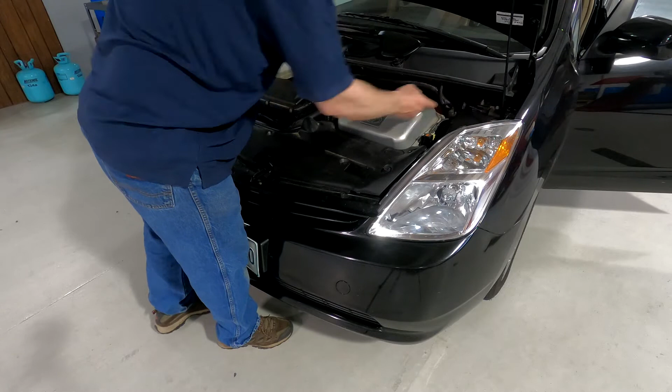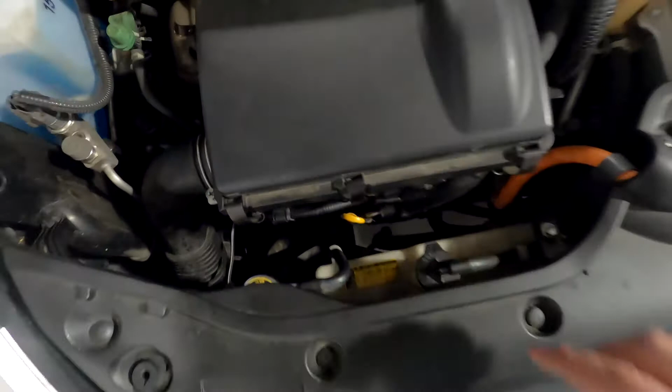There's also a prop rod that's going to hold the hood up, and in this case we place it into a slot over to the side, and that's what holds our hood up. So now we're going to check the oil. In this particular vehicle, the dipstick is this yellow handle right here. I know that because I've checked many vehicles in the past, but if you weren't sure which one it was, you could go to your owner's manual and look to see where the dipstick is for the engine oil.

So you want to use a clean rag, and we're going to grab the dipstick, we're going to pull it out, and what we want to do is we want to wipe it clean initially, and then we're going to put it back in the dipstick tube until it seats fully. We're going to pull it back out again, and we're going to check the level.

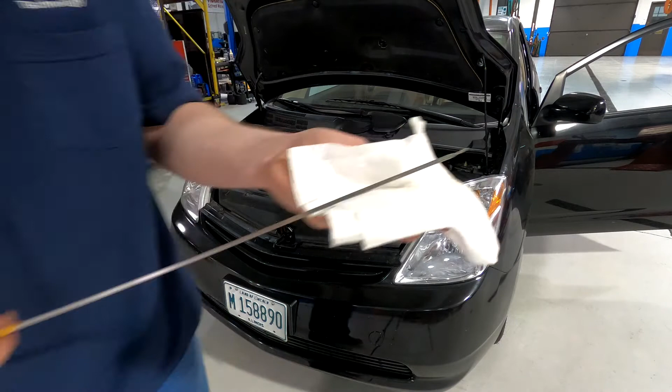And I'm not sure if this will show up well on the camera, but basically we have two marks. We have a low mark and we have a full mark. We want to be in between there. And what you're going to see is the oil, it kind of reflects on the dipstick. So right now our oil level is right up here, so that's up toward the top, and that fluid level is okay. That's exactly what we want.

The oil is nice and clean, so if you can barely see it on the dipstick, that's an indicator that you have very clean oil, and that's ideal. That's what we want. When we change our engine oil, that's to keep it in good shape. So the engine oil is what lubricates everything inside the engine, and if we don't keep it clean, we can have issues with various systems. It increases wear and will reduce the lifespan of that engine.

So I've referred to the owner's manual in the vehicle. Typically where you're going to find the owner's manual is inside the glove box.

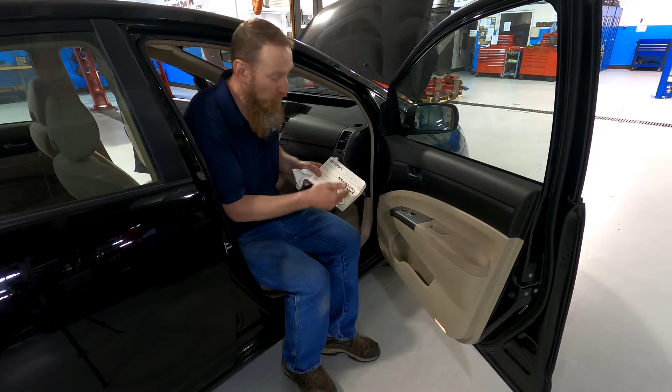So this manual will cover all the important features of the vehicle, how to operate all of the functions of the vehicle, as well as show us where the engine oil is located, right? Where the dipstick is located, how to check the engine oil, what type of oil it's supposed to use.

It will give us instructions on how to change a tire, not necessarily how to repair the tire itself, but take the deflated tire off of the vehicle and replace it with the spare tire that is in the back. So again, it would be worthwhile to read through this manual and familiarize yourself with the vehicle. Obviously you want to be familiar with it before you start to drive the vehicle.

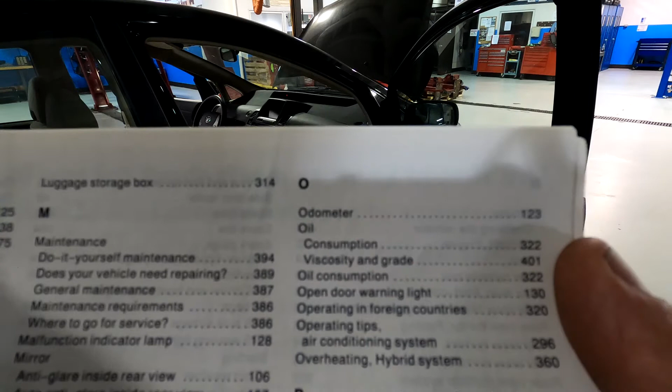If you don't have an owner's manual, sometimes you can buy old manuals online or you can buy them at the junkyard. This one is made specifically for the vehicle and it should be for your particular vehicle. But there's a lot of great information in here. So I've just gone to the back of this manual and right here it says oil consumption, oil viscosity and grade, and so that's what we're after right now.

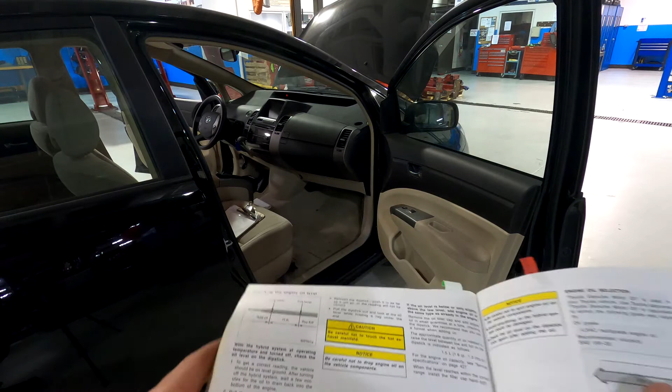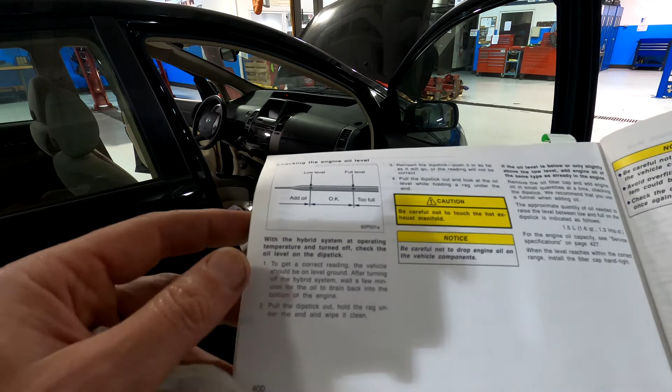So if I go to page 400, it basically shows us the same information that I just talked about. It shows you the low level on that dipstick, it shows you the full level on that dipstick, it gives you the procedure to get the correct reading. So you want to be on level ground. You want to make sure the vehicle is turned off.

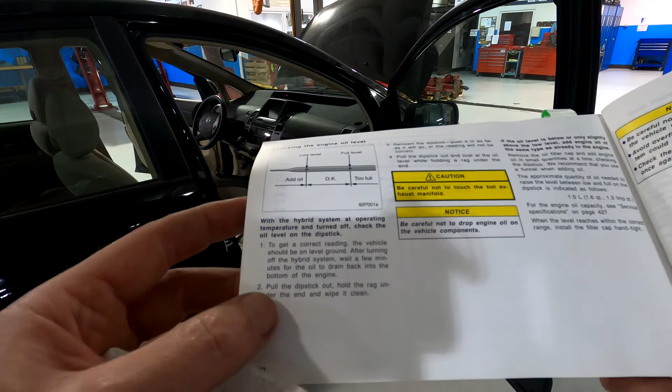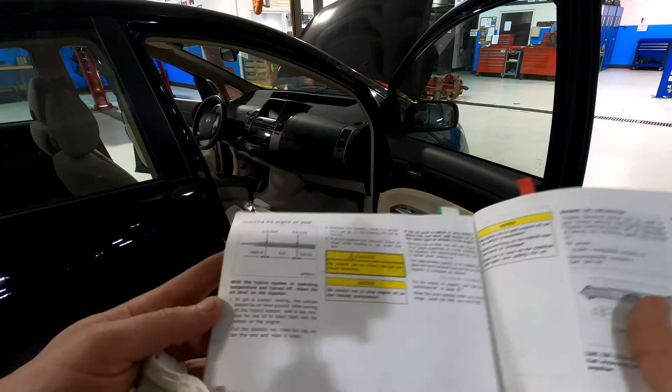You're going to pull the dipstick out and hold the rag under the end and wipe it clean, reinsert it, push it in as far as it will go, and then pull the dipstick out. So exactly what I just went through, but here you have it written right in the manual for reference in the future. One of the features that they also cover in here is checking tire inflation pressure.

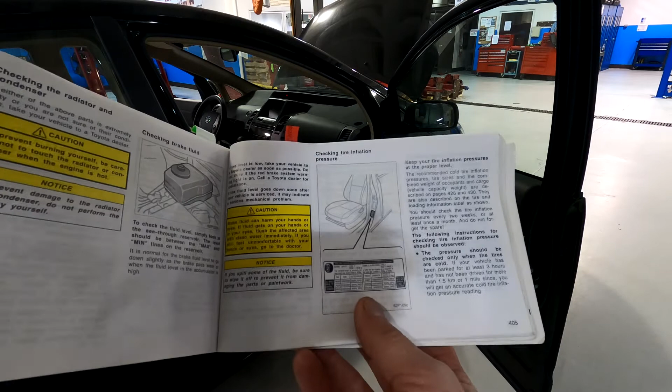So we can look on page 405 and it shows us where to find the tire inflation decal. So it is on the driver's side door, on a sticker right there in the door jamb. So I'll show you where that's at now. So in the driver's side door jamb is a decal. There's actually a couple of decals.

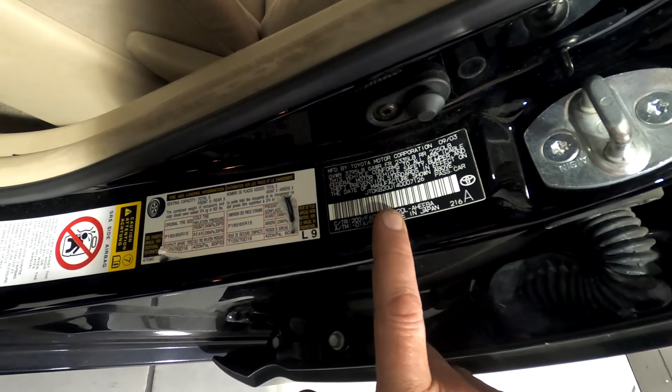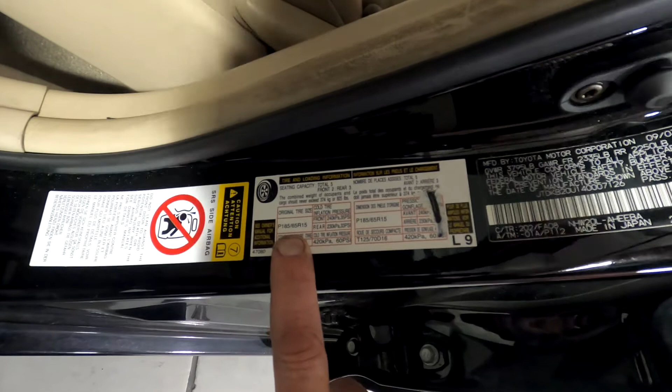So this decal up here is going to tell us all of the manufacturer information as far as the VIN number of the vehicle. Every vehicle has a unique 17-digit vehicle identification number, and so that's where that is housed, if you will. Then we come down to the next decal, and in this case, this gives me the tire size. It might be difficult to see on the video, but it's giving me original tire size.

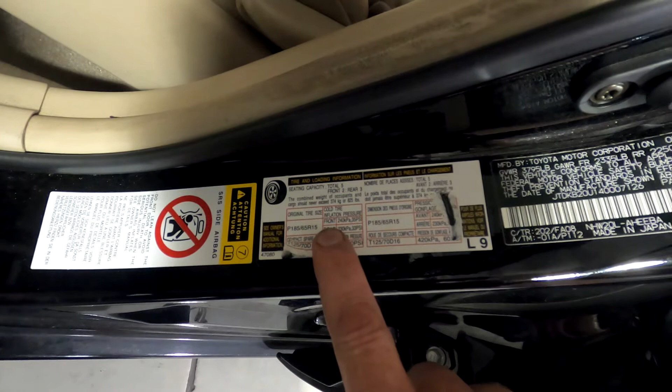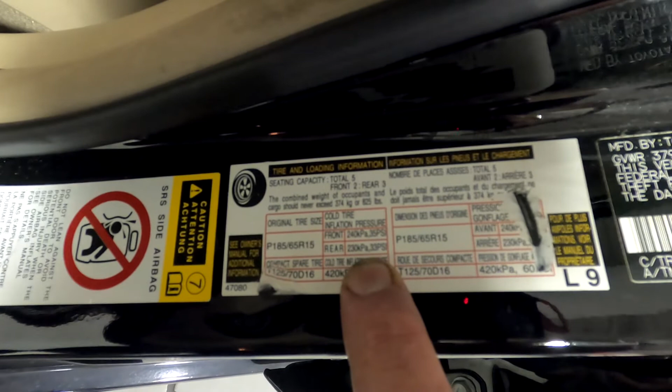It's a P185/65R15. Then it's going to give me inflation. So in this case, the inflation is 35 psi for my front tires and 33 psi for my rear tires. So you have to be aware that in some cases these will be different readings.

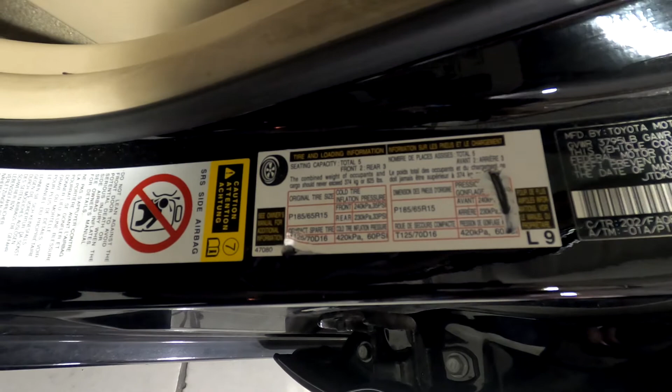In this case, this is a hybrid, and hybrid vehicles have a very heavy front end. The engine, the motor generators, that's a lot of weight. So they actually run more tire pressure in the front tires than they do in the back. So I'm going to check this tire. And basically there's a couple of options.

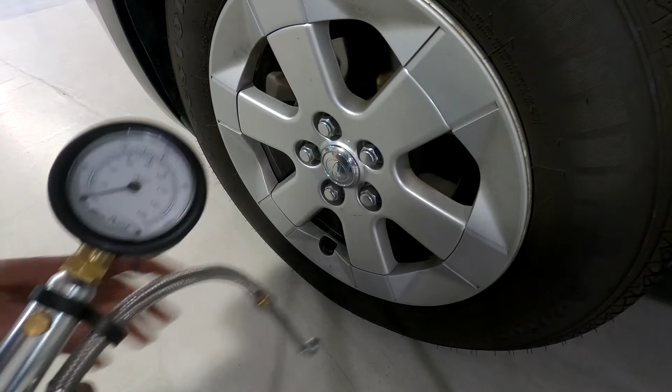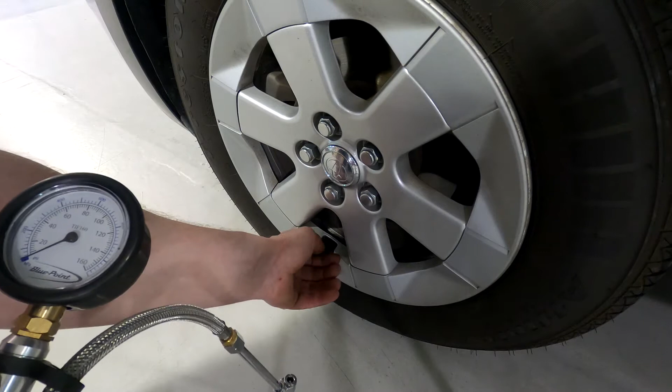We have the pencil style tire pressure gauges. That would be difficult to film, so I'm going to use a dial type gauge. So here we've got 20 psi going up to 40 psi at that second mark. So this particular tire, per the decal on the door, needs 35 psi. This is a front tire.

So I'm going to put the gauge on there. I'll push it against the valve stem, and it's reading just under 30 pounds. So this is a low tire. So I'm going to fill this. I'm connected to an air hose. You want to go in relatively small increments so you can control it.

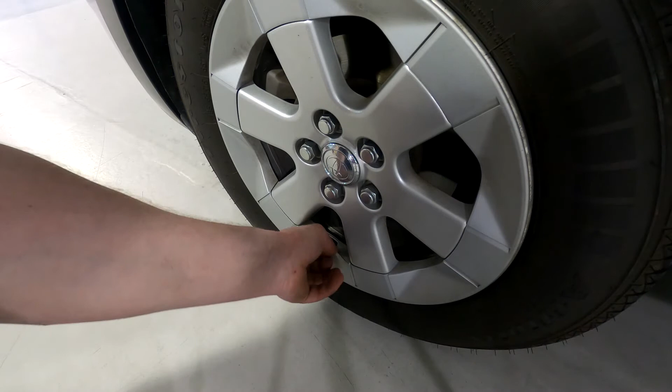So right there between the 30 mark and the 40 mark on my dial, it should be 35 psi. So that tire is good. So I just release that and I put my valve stem cap back on, and that tire is now set to the proper pressure. I would want to go around and do all of the tires on the vehicle and make sure they are properly inflated.

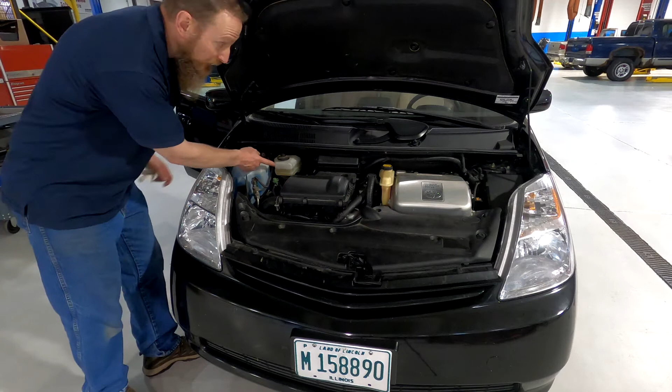Other fluids that we'll want to check would be the brake fluid. In this case, it's on this side of the vehicle. In many cases, it's on the driver's side of the vehicle. But what we're looking for is we want it to be within this minimum to maximum range that's on the reservoir. And you only want to use the proper brake fluid in this vehicle. If you're not familiar with the types of brake fluid, I would recommend that you take the vehicle to a service center and have them top off your brake fluid. What you definitely do not want to do is put the wrong type of fluid inside the brake reservoir.

If it's getting low, that's an indicator of wear in your brakes, or it's an indicator of a leak somewhere in the hydraulic system. And again, you would want to take that to a repair facility and have them find out where the brake fluid is going. But you always want to at least be aware of the level and make sure that that level is within a safe range there. Again, if it's not, you need to get the vehicle to a repair facility and find out why that level is not within the range.

Another thing we want to check is coolant level. So in this case, you have a low coolant level, and on the side here is a high coolant level. We want to make sure that we stay within this range. Again, it's very specific to the vehicle as far as what type of coolant that it uses. And so if that is low, again, you want to go to a repair facility and find out where that coolant is going, because it should not be low.

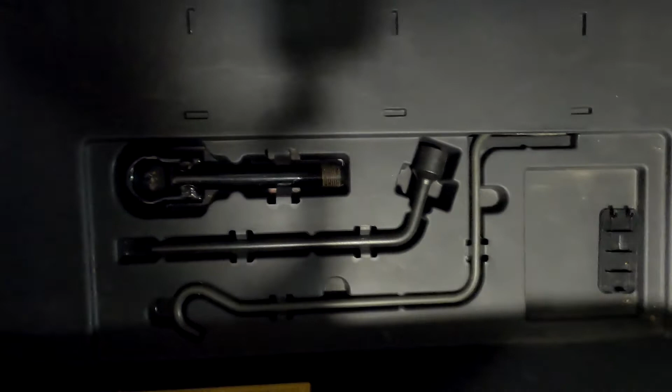So there is a storage area underneath here, and I'm going to zoom in. I'm going to show you what's inside that cavity. So right there, this is our tire iron. This is the jack handle. So we have to figure out where they've put our jack now. Typically it's underneath this. So what we're going to do is we're going to lift this entire panel out. So I will back out with the camera so you can see what happens there.

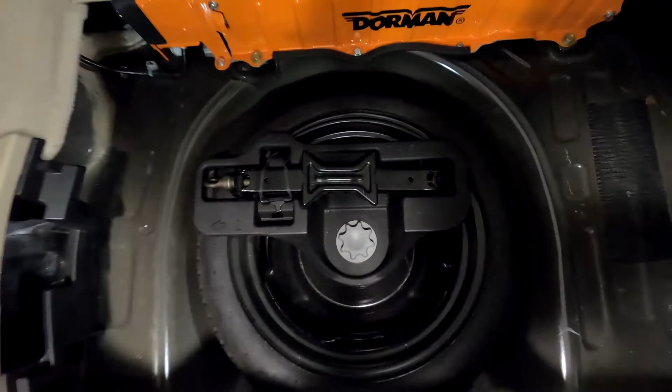So I'm going to lift this housing out. Now I can see my spare tire. So right there, this is the spare tire itself. This is the jack assembly for lifting the vehicle up. So I'm going to remove both of those now. So this is rubber banded into place. And so, again, you'll have to check your owner's manual to find out how exactly they want you to remove this stuff. But the jack will lift out like so. I'm going to set that aside.

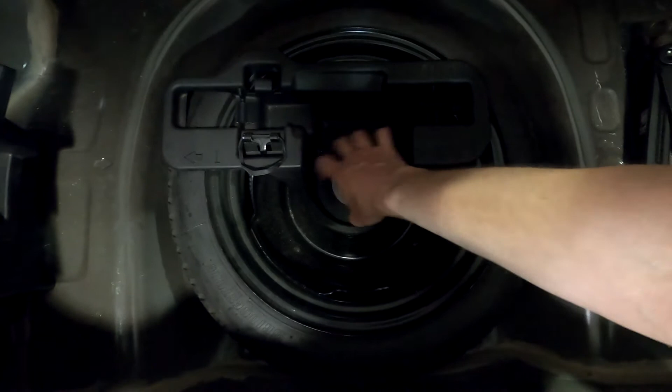And then the tire is held in by this nut. So I'm going to unscrew that nut. I'm going to remove it, but I need to hang on to it because I need to put the tire back in. So once I lift that out of there, that's basically your jack retainer, the holder for the jack during most normal usage. The tire should lift out, and I'm going to lift it out now.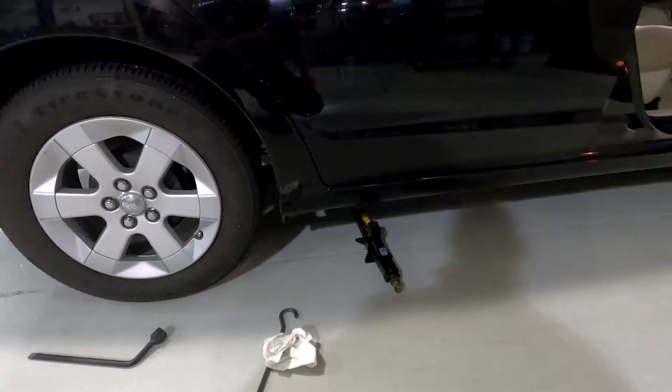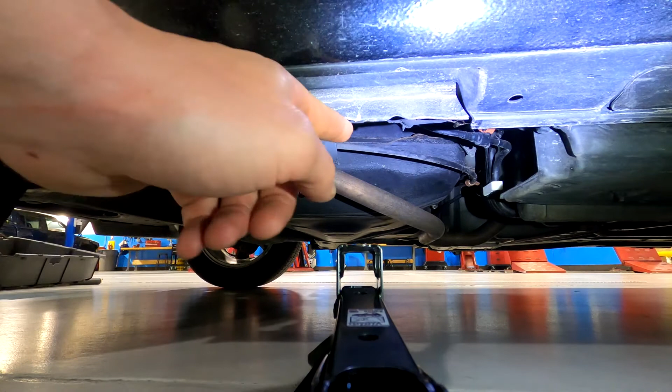So underneath this vehicle, along the bottom of the body, is what we would call a pinch weld. I'm trying to shine some light on this right now with my flashlight. So right here there's a dimple, and right there's a dimple, and so this jack is going to fit right between there as we raise the vehicle. Now again, this is in your owner's manual. If you're not comfortable doing this, my suggestion would be to call and get some help. You could call a repair facility, you could call a tow truck.

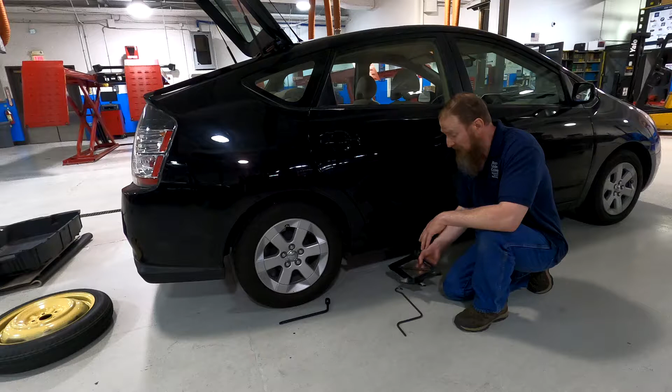One word of caution, you want to make sure that you're on stable ground, right? A solid footing for this jack. It doesn't have a lot of surface area, so you don't want to be in loose gravel or in dirt. Ideally, you want to be on concrete, asphalt, something like that. And just want to make sure the vehicle is as stable as possible. If you have something to block the front wheels, put something in front of and behind the front wheel to prevent the car from rocking, that would help.

In this case, I'm on flat level ground, so I'm just going to put the jack under here and I'm going to start lifting it up. Now I can adjust this by hand, so I'll just raise it up as close as I can, like so. Once I've taken up all the slack, then I'll have to, of course, use the handle and start to raise the vehicle with the handle.

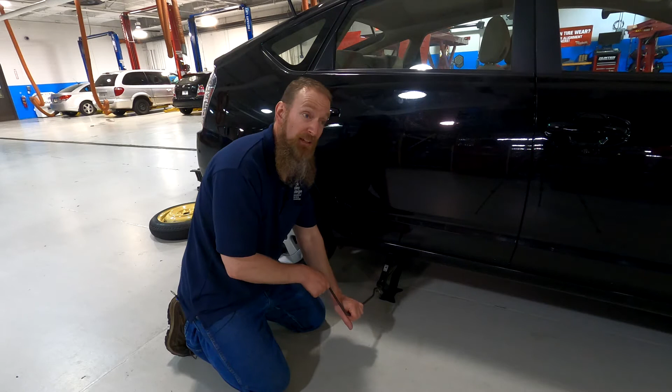I'm going to crank this until I take the weight off of this wheel. So I'm trying to raise the vehicle just enough to get this wheel off the ground. Obviously, I want to keep the vehicle as stable as possible, so I don't want to go too high, but just so I can rotate that wheel and get it off.

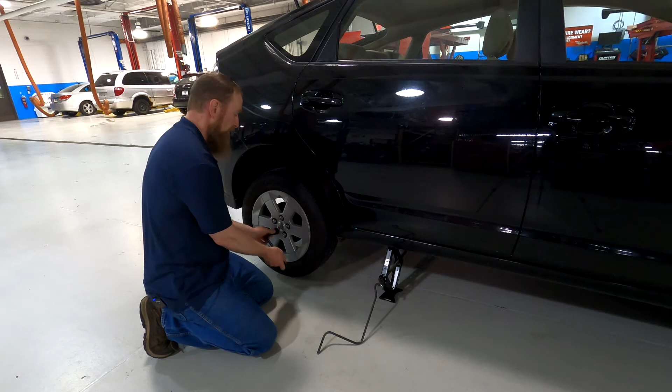So that should be enough, so I can rotate the wheel. Depending on how loose I got the lug nuts, I may have to use the wrench to loosen them. Then it's just a matter of unthreading each of them.

You do want to try and make sure you keep these clean. So you don't want to set them down in a bunch of dirt and end up getting dirt inside on the threads. Because if debris gets stuck between the threads in this lug nut and the threads in that lug stud, it's going to be very difficult to thread them back on, and in some cases you could damage the threads. We don't want to do that.

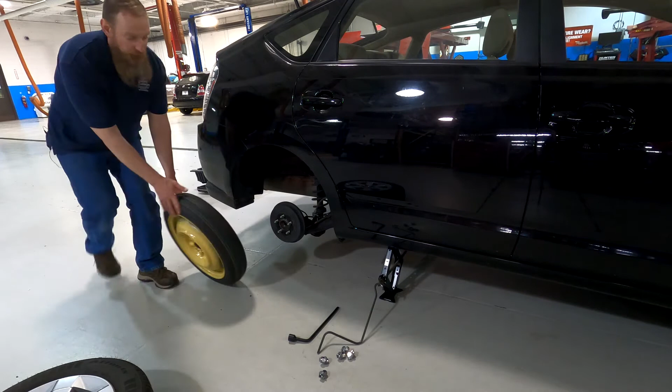Again, I have the benefit of being on a nice clean concrete floor, so we're going to gently lift the wheel off. Sometimes they don't come off that easily. In this case, I'm going to put the spare on just to go through the motions and show you what that would look like. So I'll go grab my spare. So the spare will just lift into place.

I want to put all my lug nuts back on, and again, I should be able to do this by hand if all of the threads are clean. You don't want to put lubricant on these because that could affect torquing them properly. We don't want a wheel coming loose. That's the worst thing that could happen, is a wheel comes loose.

So I'm just going to snug them all up by hand. I'm going to take it one step further. I'm just going to tighten them as tight as I can get them with the lug wrench up in the air. And just double check. I'll go through each of them again. Okay, so now I've got them snug down. Would I call that tight?

Absolutely not. What I want to do now is I want to lower the jack down just to the point where this tire is making contact with the ground. All I'm trying to do at this point is prevent this wheel from spinning as I try to tighten the lug nuts. If I don't put enough weight on this wheel, then the whole wheel assembly will spin as I try and tighten it. So I'm going to try and just gently set some weight down.

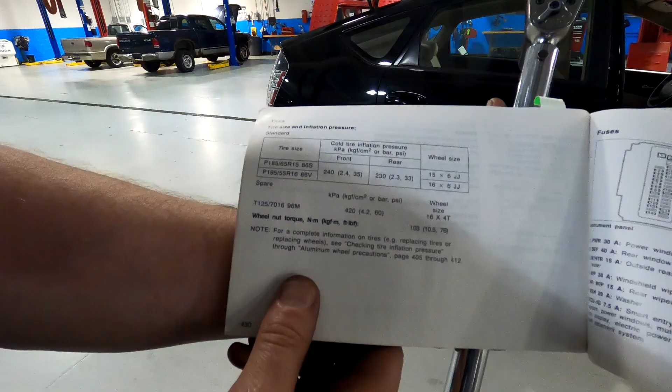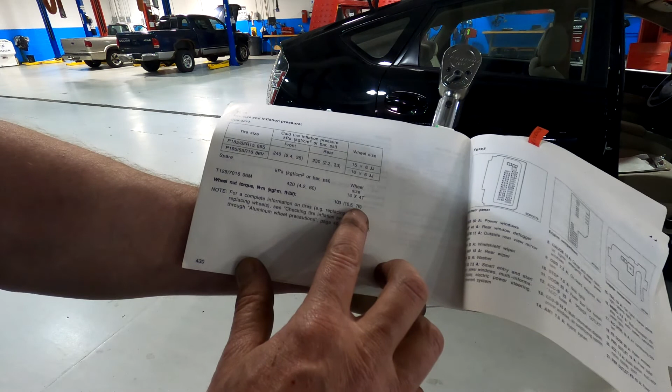So now I'm actually going to take this wheel back off because I need to put the original wheel on the car. In the back of the service manual, it has tire size and inflation pressures, but down below it also has wheel nut torque. And so this particular wheel is 76 foot-pounds. So I've got my torque wrench set to 76 foot-pounds, and I'm going to tighten these lug nuts in an alternating pattern. That click is 76 foot-pounds.

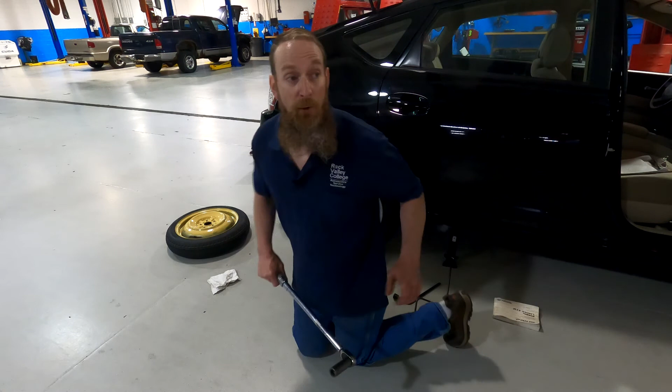Now I can take the weight off of the jack. That will put all of the vehicle weight back on the tire itself, and I can take the jack out and put it away. Again, there's nothing saying you have to do this yourself. If you're not comfortable doing so, by all means, there's nothing wrong with asking for help.

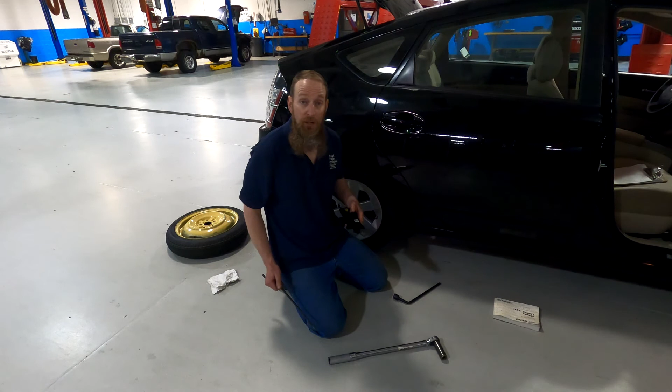If you're in a situation where you're not sure if the vehicle is on stable enough ground, the safest thing to do is going to be to call a towing company or call the shop that you would normally take your vehicle to and have them come out and assist you, or they will send somebody out to assist you. You don't want to put yourself in harm's way. If you don't feel safe doing it, don't do it. Call for some help. There's nothing wrong with calling for help.

Another thing worth mentioning is the spare tire and its tire pressure. Often that tire gets overlooked when we're checking all of our tire pressures. So you'll want to either check it yourself. You have to pull it out of the vehicle and flip it over because the valve stem, the way it sits in the car, is facing down and you can't get to it.

But at some point, whether it be when you get your oil changed or your tires rotated, you want somebody to check that spare, because you want it to be full when you need to use it. And if nobody is ever checking it, that tire can slowly leak over time, and when you do actually need it, it can be flat. So again, when you're checking the other tires, it's a good idea to check the spare tire pressure as well.

So I hope this is helpful. I'm going to put this all back together. I just wanted to quickly give you an overview. Very, very basic maintenance on a vehicle. Another thing to check would be all of your lights. Make sure they're all working. That becomes a safety issue as well. You want both headlights working. You want all of your tail lights and your turn signals working.

And if those bulbs are burned out, you've got a couple choices. Typically, the owner's manual will guide you through replacing them. If you're not comfortable with it, or can't make sense out of the owner's manual, by all means, call your local shop. They'd be more than happy to help you replace that bulb, replenish fluids, things like that.